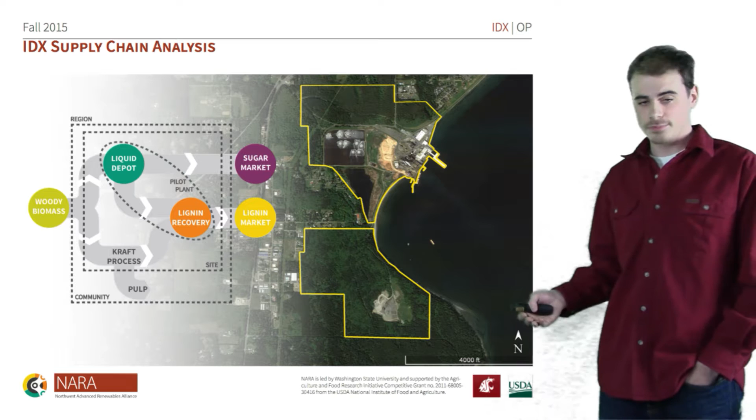So like I said last time, we bring in the woody biomass into our liquids depot. We looked at the liquids depot and that process with the biomass, then took a zoomed out step back and looked at the sugar market and the lignin market, and looked at the feasibility of our products. Today, we're going to be talking about the liquids depot in regards to the Port Townsend Paper site.

You will see 3 potential site locations and how we're going to do system design for those 3 locations. We're going to weigh the pros and cons for each, and then take a qualitative standpoint as far as costs for each site.

Thanks, Taylor. So we're going to get started today talking about the liquids depot. When we're going into our site analyses, we're going to break these up into 3 separate footprints. They might be grouped together or separately based on the layout of the site. Our first footprint is for our chemical storage, which we project to take about 0.1 acres, where all of our chemicals will be stored, pretty straightforward.

Our liquids depot, where the process actually happens, we think will take about half an acre, and our packaging and distribution footprint will be about 0.5 acres as well. Taylor will go a little more into how that actually works when we get into our first site analysis.

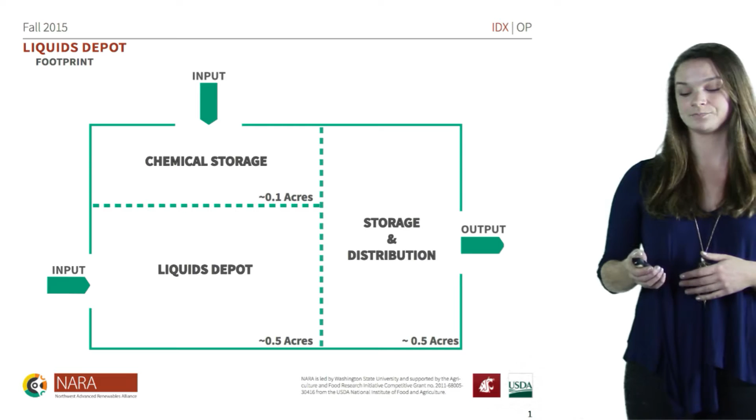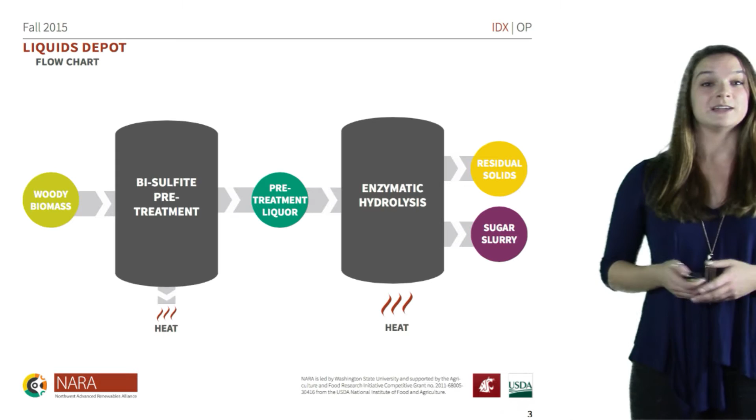We talked about this before. Our liquids depot is a very intensive process, but we've simplified it into these 4 steps, and even further simplified into mild bisulfite pretreatment and enzymatic hydrolysis. As previously discussed, we expect a water demand of about 2 million gallons of water a day, and we also expect to create about 60 new jobs.

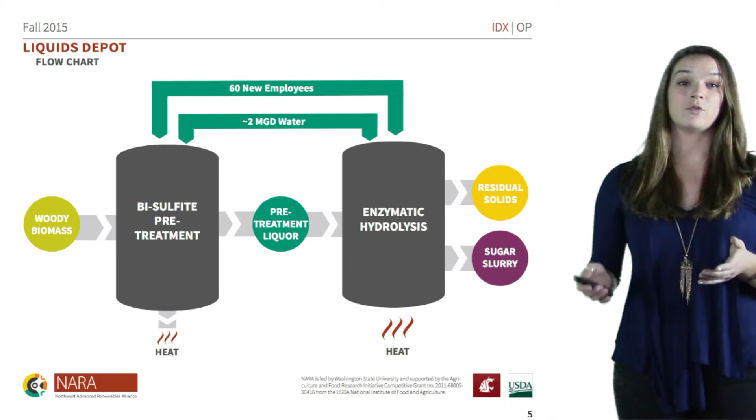An important thing to note as we start talking about the water and chemicals needed is that these have about an 80% or so recycling rate. So while we need this amount of water and a certain amount of chemicals to get started, they will be recycled throughout the system.

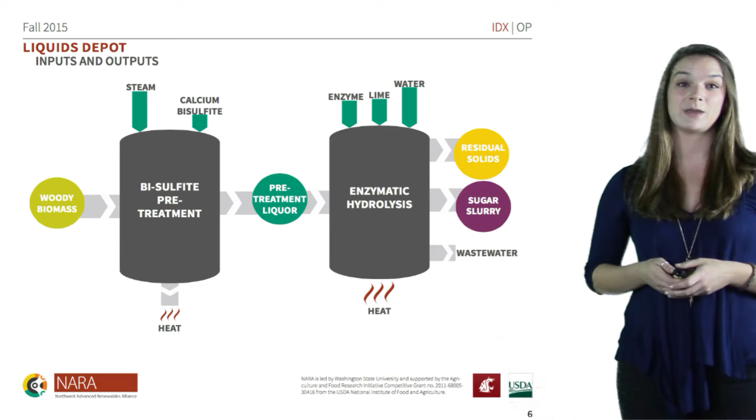Going further into our chemical process, for our calcium bisulfite, enzyme, and lime, those will be stored in our chemical storage facility, again about 0.1 acres of space. We have been doing research into how much these chemicals cost, where you can buy them from, and how much of each chemical needs to go in per batch.

There are still some variables that we need to address, but we are working on that, and we'll have those numbers for you sometime next semester, hopefully.

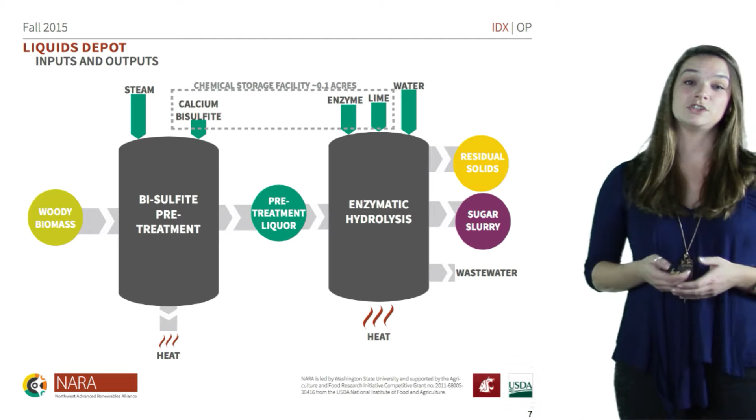Again, after our woody biomass goes through its mild bisulfite pretreatment, it ends up as a pretreatment liquor, and then goes into its enzymatic hydrolysis, we end up with a sugar slurry and a residual solid product. Those will be stored in our packaging and distribution center, which is about half an acre of space. All of the heat and steam generated in this process, most of it is recycled back into the system as an energy source, and once again, our water and chemicals are also recycled back through the system.

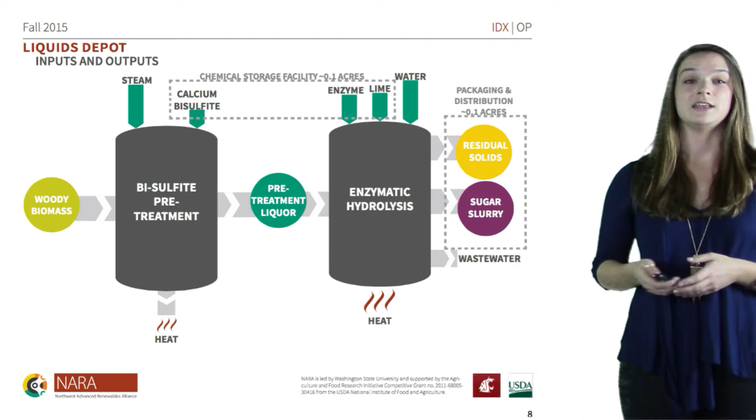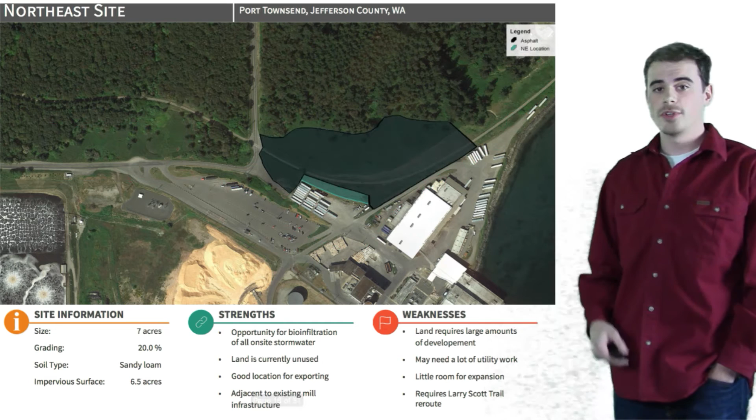So next I'm going to take you through our process flow, products in and products out, and how this operation works.

The gray area you see here is the proposed paved area, which is about 6.5 acres.

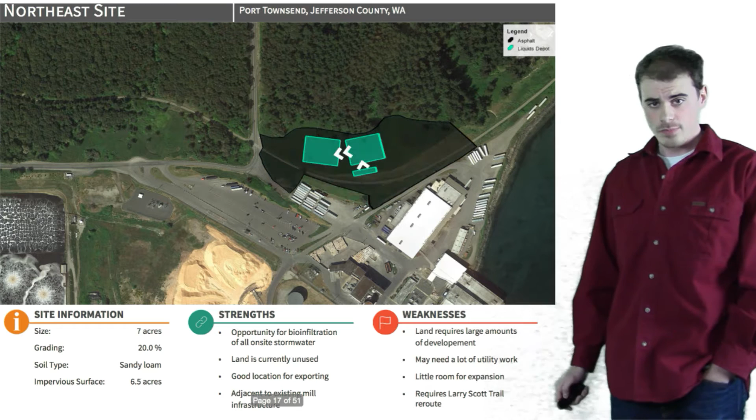Looking at our actual facilities, the small building you see here is our chemical storage, which flows into the liquids depot, and from the liquids depot our process flows into packaging and distribution. As Destry mentioned earlier, that's about above an acre in size.

Next we're going to look at utilities. The yellow object you see is the existing electric substation on the Port Townsend site, and that's the flow from the substation to our proposed site using existing telephone lines.

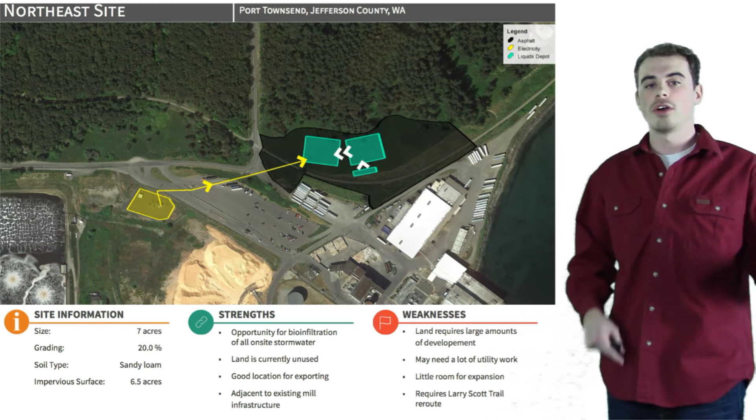Also not seen is potable water and sewer from our site. Potable water is something we definitely will be using for our site. But as we choose our potential site and look more into it, we'll get more existing infrastructure and decide how we're going to tie into those lines.

Next we're going to look at product in and the chip pile. The red line you see is products coming in, as far as biomass and chemical products going into the chemical depot. The trucks go in through the existing path of the Port Townsend paper site, which would be a weakness because it would conflict a little with our operations.

To mitigate that, we decided to put a weigh station on our site to keep it separate from their traffic on the existing Port Townsend paper site.

So when the biomass comes into the brown chip pile, it will be transported from the chip pile into the liquids depot, where it gets processed. The green arrow you see here is from the liquids depot, where we would produce dry lignin and a sugar slurry, which would be a liquid.

The dry lignin we propose would be stored in 2,000-pound tote bags, stacked on pallets two high, in any arrangement we see fit necessary.

For our most desired product, the liquid sugar slurry, that would be stored in large liquid tanks, which could then be pumped into storage trucks. This is also a strength of our site, as this flow exits out into the road, so it can either truck out, or be taken to a barge, which Port Townsend Paper has great access for.

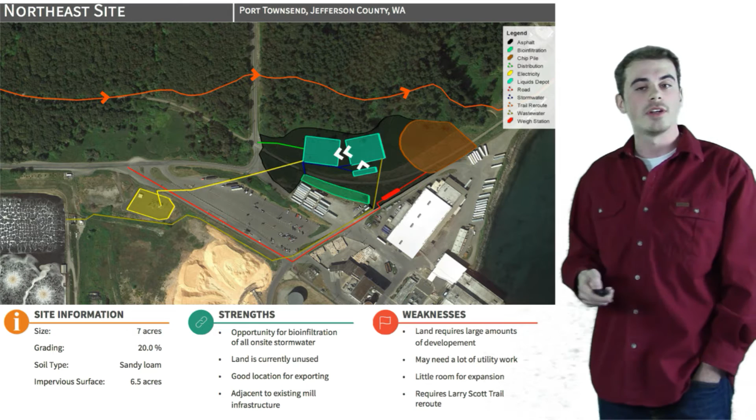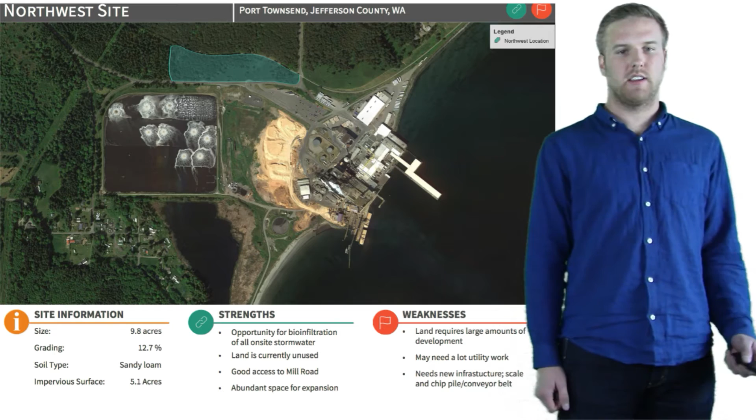Thank you, Taylor. So let's take a step back and look at the northwest site. This site is located just north of Mill Road, but south of the Larry Scott Trail. Zooming in closer, you can see this site is about 10 acres, more or less, although we will not be completely utilizing all of that. The grading of the site is not quite as extreme as the northeast site. Again, with the 20-foot contours, it's only about a 50-foot elevation gain between the north and the south.

Looking at where our pavement would go on the site, it's about 5 acres worth of impervious surface, and it's a great location just due to its proximity to Mill Road.

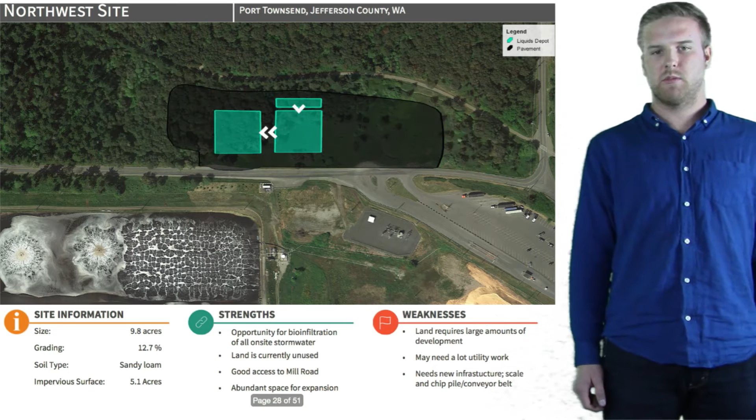Seeing what our buildings would look like on this site, it's just over an acre for these 3 buildings: the liquids depot, the chemical storage, and the distribution building.

We would also be utilizing the same electrical substation here, with just a short run that would need to be added to bring electricity over to the buildings there.

If we were to put a chip pile on the site, it would go about here, and the road would be very easy access just due to its proximity to Mill Road. We'd also be adding a scale here to weigh in and out the trucks, unloading the chips and chemicals going into our process.

The trucks leaving the distribution facility would have great access as well to Mill Road.

Our wastewater would be very close to the existing wastewater facility, however it would need to go across Mill Road, which would involve probably high construction costs just due to the trenching involved.

However, a pro for our site is we have plenty of room for the same bio-infiltration opportunity that the northeast site had. We'd have plenty of room to make a big enough bioswale that could handle all of the stormwater runoff from the impervious surface of this location.

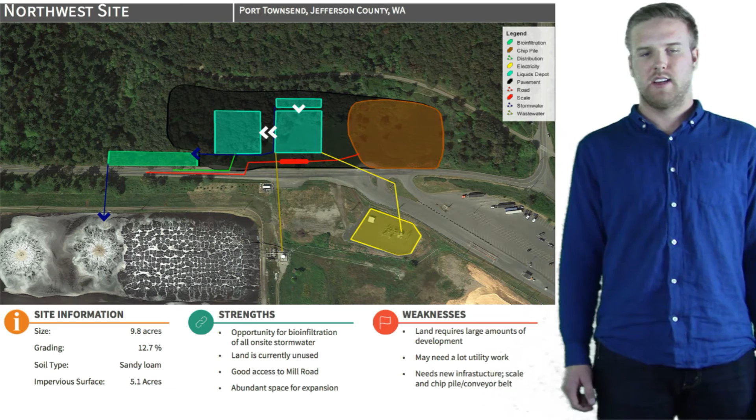Overall, this site is a little bit better than the northeast site due to its shallower grading and more room for expansion and ease of building. Also, the access to Mill Road is really good. However, it's not quite as good as the central site, which Casey is now going to talk about.

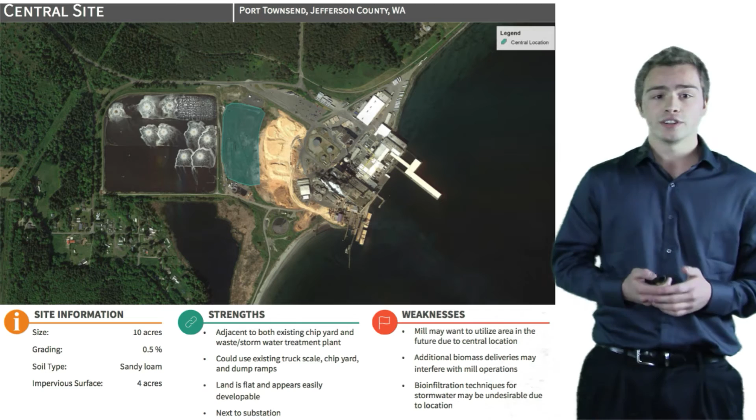So the final site we're looking at is the green field between the wastewater treatment plant and the chip yard. Zooming in, it's about 10 acres and very flat, with only a few feet of elevation change. The site appears ideal because very little site prep would be necessary, and it's very close to existing infrastructure. For the schematic design, we would need about 4 acres of impervious surface, shown here.

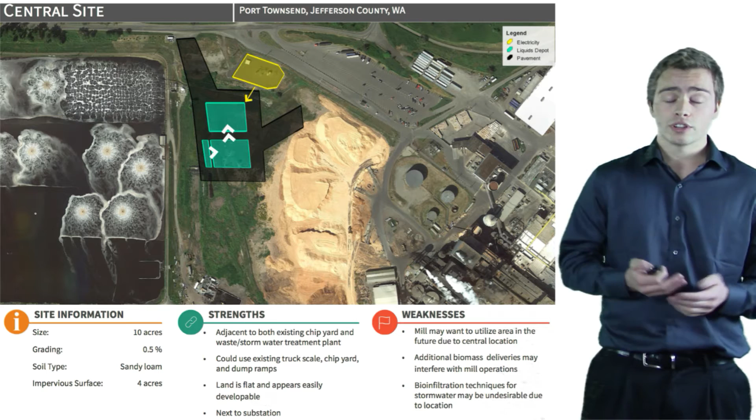Out of this, about 3 acres would be pavement and 1 acre would be the liquid depot facilities. For electricity, the substation is very close, which is a strength for us.

Now adding inputs, the red path leading to the liquid depot represents chemical deliveries, and the longer red path represents biomass deliveries. A strength of this site is that for biomass, we could utilize the existing truck scale and biomass dump ramps. There are concerns whether the infrastructure could handle the increase in deliveries, but we're confident the projected 50 truckloads per day would not significantly slow current operations, since that number is small relative to current truck deliveries to the mill.

Also shown here is our location to store the biomass, about 1.5 acres. Currently there's wood chips stored there, so the highlighted brown area further to the south represents an area where we can move those wood chips. The brown path is simply the route where the biomass would enter the liquid depot.

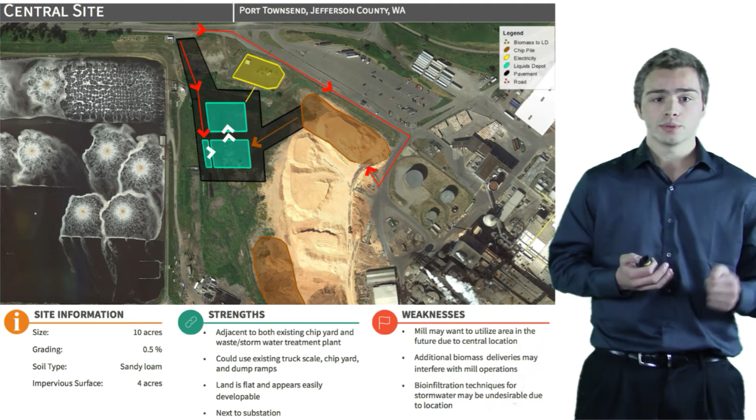Looking at the outputs, the green path to the north represents shipments via truck, and the path to the south leads to the port, representing shipments via barges. Barges would be good because they tend to be much cheaper than trucks, and minimizing trucks coming in and out of the mill is also a benefit.

For the wastewater, it would simply be discharged into the existing wastewater treatment plant, a short distance away. And finally, for stormwater, we have a few options. It could simply be discharged into the wastewater treatment plant, since the mill currently discharges their stormwater there as well as their wastewater.

But we want to avoid any unnecessary inputs there, so we could do a bioswale like the other 2 sites, shown here, including an overflow pipe. The soils here are rapidly draining, and Port Townsend only receives about 19 inches of precipitation per year because it's in the Olympic rain shadow, so the actual size of the bioswale will be pretty small.

But even so, this might potentially be unappealing here because this central land is valuable. One final technique we're looking into is using filters. Current research here at WSU has shown that you can filter stormwater by running it through raw wood crumbles. This is an emerging and exciting technique because it'd be very cheap, so we'd like to further explore that, and tests have shown it to be very effective.

So now that wraps up this site, and now to compare the 3 sites and conclude the presentation, I'll hand it off to Joey.

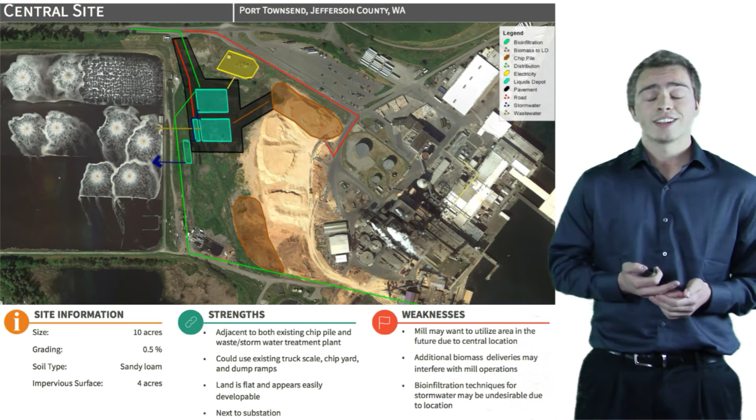Thank you, Casey. So now that we've looked at the three sites, I'm going to compare them in a qualitative scope. When looking at the capital expenditures, we broke it down into a couple different sections, which I'll briefly go through.

We started with site preparation. This section included expenditures that you'd have to capitalize in order to get the land up and running for its intended use, things such as cut and filling, regrading, cutting down trees, and any of that kind of mobilization of dirt.

We then moved down to any utility work. For example, the top two sites, or the two north sites, would have to be installed pre-grade, and they'd have to not really tie into anything necessarily very close. I'll touch on that in a second.

And there's trail rerouting that we included. This would involve anything that would have to move the Larry Scott Trail or make improvements to it in order to create a buffer between the facility and the people walking on the trail.

We also included chipyard modification, or in the two cases of the north sites, the idea of a conveyor system to utilize the existing chipyard and move the chips up to those particular sites.

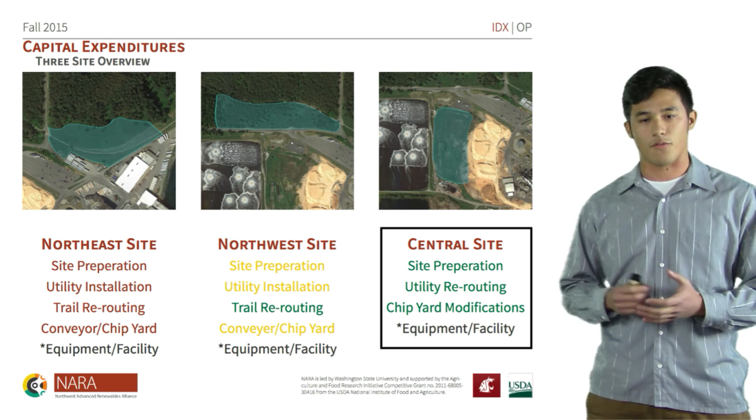So bringing all three back up together, you see that on the far side we have mainly red, in the middle we have yellows and one green, and on this close side we have a lot of green. So from our standpoint overall, we believe that the central site looks to be the most promising out of all three for a pilot facility. But again, I just want to say this is a qualitative view from a capital expenditure standpoint.

Looking forward to next semester, we're going to be doing more design on the central site. We want to look at grading and site development, some more in-depth capital expenditure and operating expenditure analysis, as well as the utility ties and wastewater ties. We're also very excited to look into potentially taking the stormwater runoff from our facility and Port Townsend Paper Company's facility and putting it through other filtration processes and methods, as opposed to just putting it into the wastewater treatment.